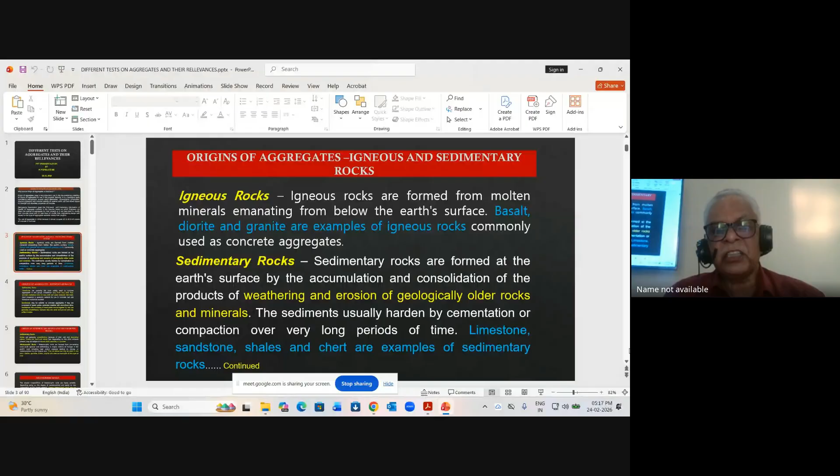Sedimentary rocks like limestone, sandstone, and shales are examples. Limestones are probably the most used concrete aggregates in this group. Limestones vary from hard, fine, grain crystalline rocks to very soft and weak material like chalk.

So hard limestone is generally suitable for use in concrete, but soft limestones are to be avoided. That means there are two types of limestones: soft and hard. Soft stone is not suitable for concreting. So these are concrete aggregates.

Again, there's sandstone. There are two types of sandstone. They can be used as concrete aggregates only if they contain quartz grains cemented together with amorphous silica. But there are certain ones bound with clay, and they are unsatisfactory to use in concrete.

Sedimentary rocks like shales are generally unsatisfactory because they are soft and absorptive. Cherts are hard and dense, but depending upon the silica minerals, they may be subject to severe alkali reactivity in concrete.

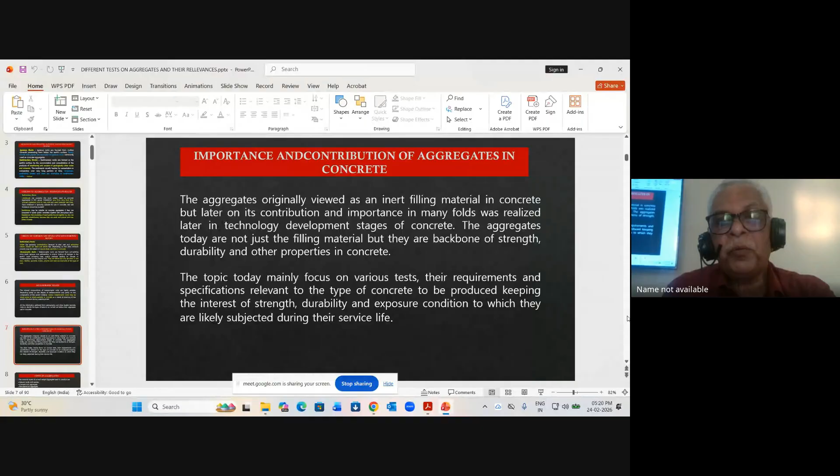Today, concrete aggregate is not just the filling material, it is a backbone of strength, durability, and other properties of concrete. The topic today mainly focuses on various tests, their requirements, and specifications relevant to the type of concrete produced, keeping in the interest of strength, durability, exposure conditions, weathering conditions, etc.

So there are three types of aggregates: natural sands and gravels, crushed rock sands, and manufactured sands. Natural sands and gravels are basically from riverbeds. At present, of course, they're not allowed to be used in construction.

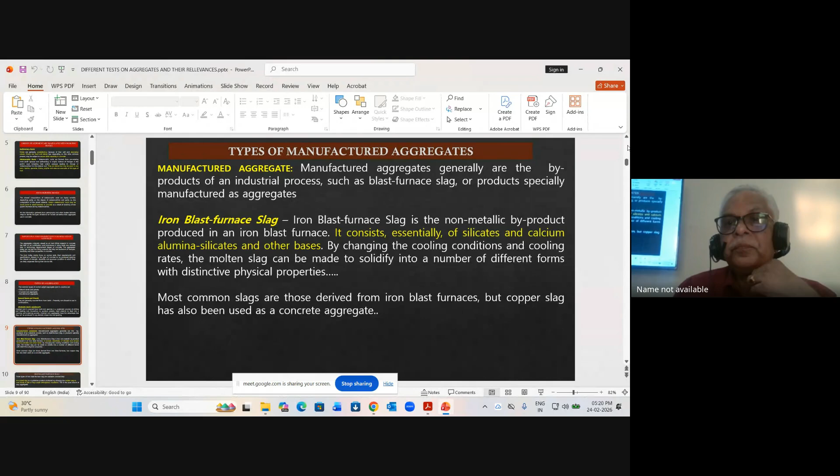Crushed rock is sourced from hard rock quarries. It is obtained by blasting, drilling, and screening. Such aggregates cannot have their properties modified. The only modification that can be done is cutting into proper shape and sizes. That's all that can be done with aggregates, because other properties depend upon the parent properties of the rock from which they are sourced.

Nowadays, there's even demand for manufactured aggregate. Manufactured aggregates are basically byproducts of industrial processes, such as blast furnace slag.

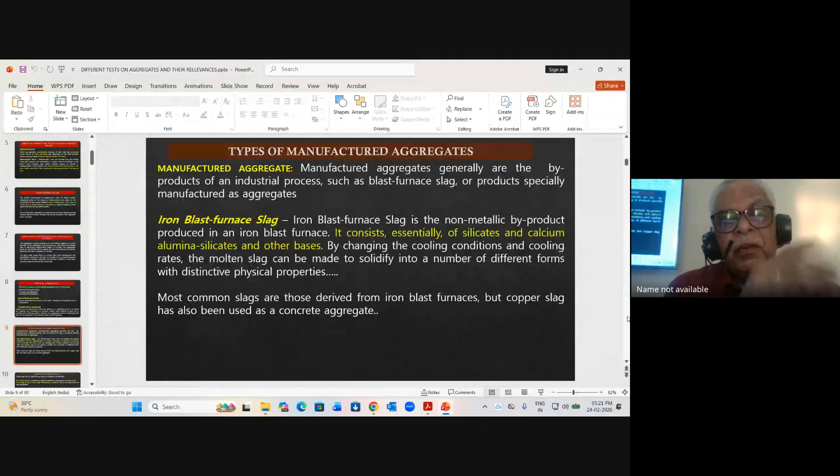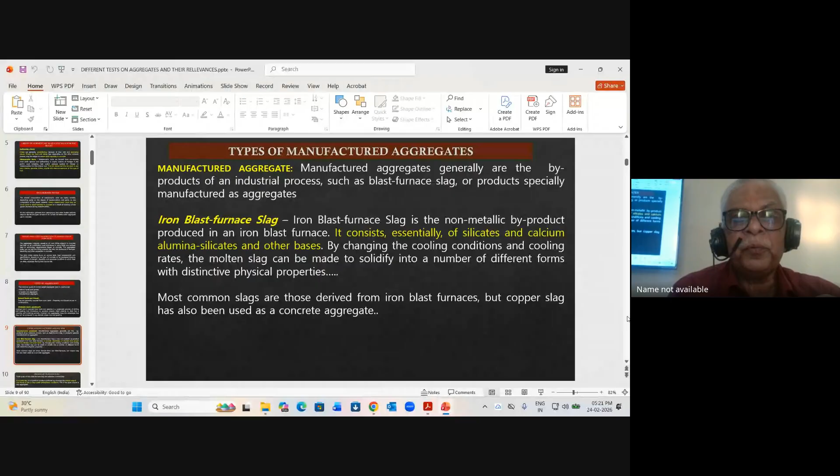There are different types of furnace slags. One is iron blast furnace slag, a non-metallic byproduct produced in an iron blast furnace. It essentially consists of silicates and calcium alumina-silicates, and other bases. By changing the cooling condition and cooling rate, the molten slag can be solidified into a number of different forms. Most slags are derived from iron blast furnaces, but copper slags have also been used as concrete aggregate.

Air-cooled slag, granulated slag, and foam slag are some typical examples of iron blast furnace slags. I will not go into much detail on it.

There are lightweight aggregates like expanded clay and shales. It is manufactured from clay and shale, heated to about 1200 degrees. When it begins to melt and fuse, some gases are generated which expand and form honeycombs, forming small cells in the aggregates.

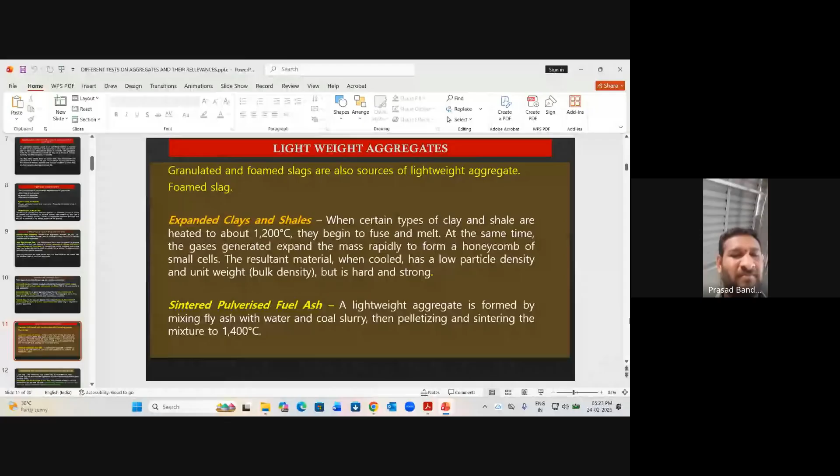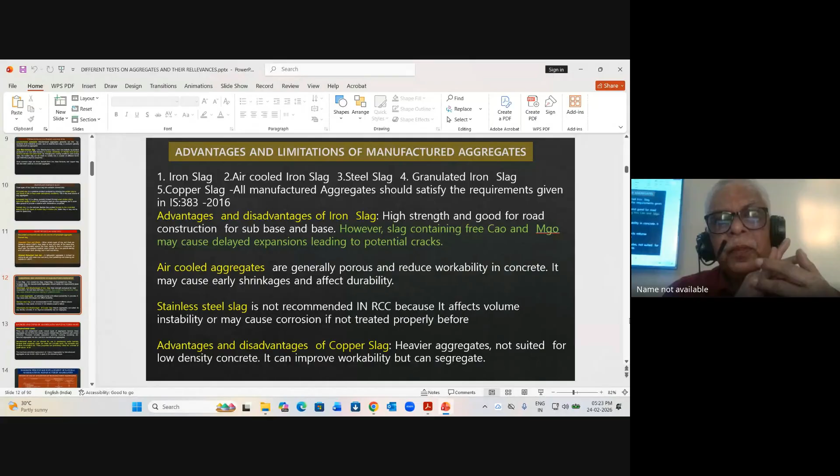Hello? Hello? Advantages, and we have to know, understand that... some disturbance is there. Hello? Mr. Prasad, can you please mute your mic? Thank you.

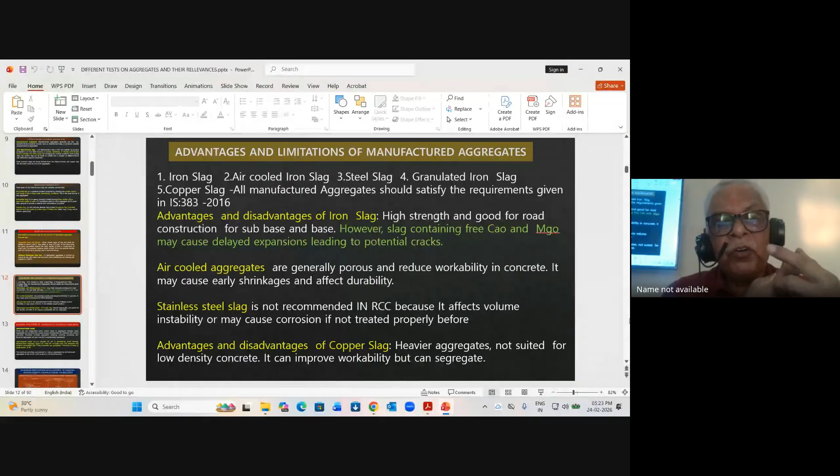So there are some advantages and disadvantages of using slag in concrete. First of all, iron slag has high strength and is good for road construction, for slabs, subbase, and bases. However, slag containing free calcium oxide and magnesium oxide may cause delayed expansion, leading to potential cracks. This is a disadvantage of using iron slag.

Air-cooled aggregates are generally porous, reducing workability in concrete. It may cause early shrinkage and affect durability. This is the negative aspect of air-cooled aggregates.

Stainless steel slag is not recommended in RCC because it affects volume stability or may cause corrosion if not treated properly beforehand. Copper slag is heavier, not suited for low density concrete. It can improve workability but can segregate concrete. These are the advantages and disadvantages of some of these.

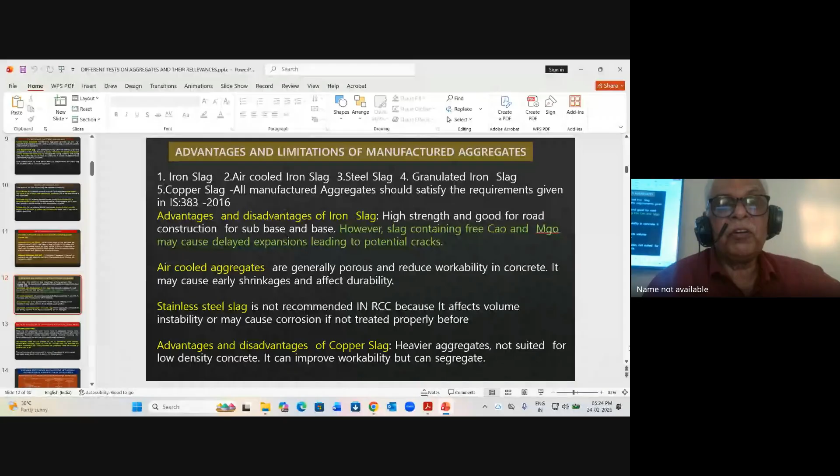There are reasons for that, some of which I'm going to highlight here. Replacement of iron slag aggregate in RCC is limited to 25% in RCC works. This is because higher replacement can lead to slow gain of strength and demand for extended periods of curing. This is a disadvantage with iron slag.

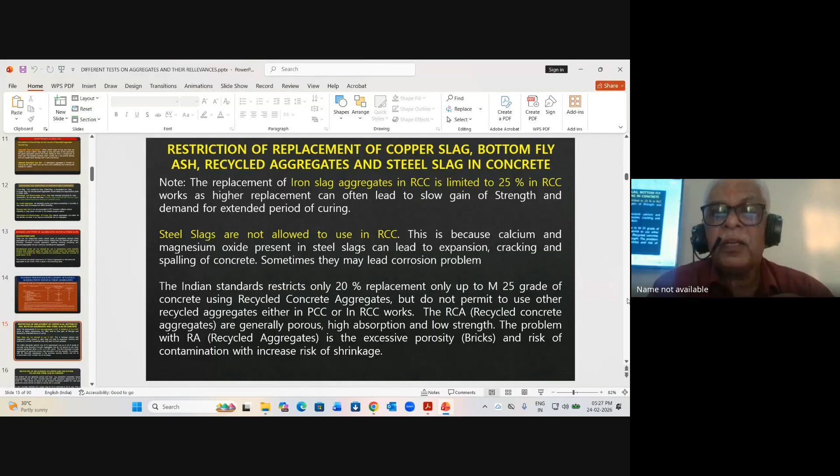Indian standards also restrict 20% replacement only up to M25 grade concrete using recycled concrete aggregates, but do not permit use of recycled aggregate either in PCC or in RCC work. Recycled concrete aggregates are generally porous, have high absorption and low strength. The problem with recycled aggregate other than concrete is porosity, risk of contamination, and high risk of shrinkage. That's why they're not allowed to use in some cases.

When we come to fly ash, bottom fly ash is generally porous and has low pozzolanic properties, and is recommended only for lean concrete, with a maximum percentage of 25%. In fact, IRC 74-1970 allows only Portland Pozzolana cement for road and pavement, but does not allow the use of fly ash in concrete.

In lean concrete, restriction of copper slag for fine aggregate is restricted to 50% maximum. This is because copper slag generally contains traces of heavy metals like arsenic, lead, which makes concrete unstable. It also causes delayed setting time, increased flow, sometimes leading to bleeding and segregation. Their specific gravity is more than 3.2, 3.3, 3.4. So any replacement beyond 30-40% can reduce the strength of concrete. It not only reduces the strength but also leads to segregation because of its high specific gravity properties.

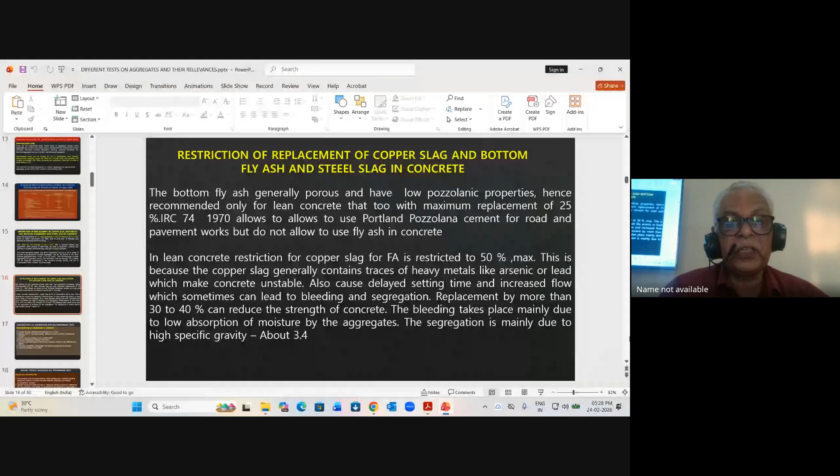What is the contribution of aggregates in recommended tests? Basic requirement is that aggregate provides strength, stiffness and durability to concrete, reduces voids in concrete thereby reducing porosity and also increasing strength, lowers cement content in the concrete mixture, ensures dimensional stability of concrete, improves durability against weathering, abrasion, chemical and other abusive attacks, improves workability, pumpability and finishing properties of concrete, and controls shrinkage in concrete. These are some of the main contributions of aggregates in concrete.

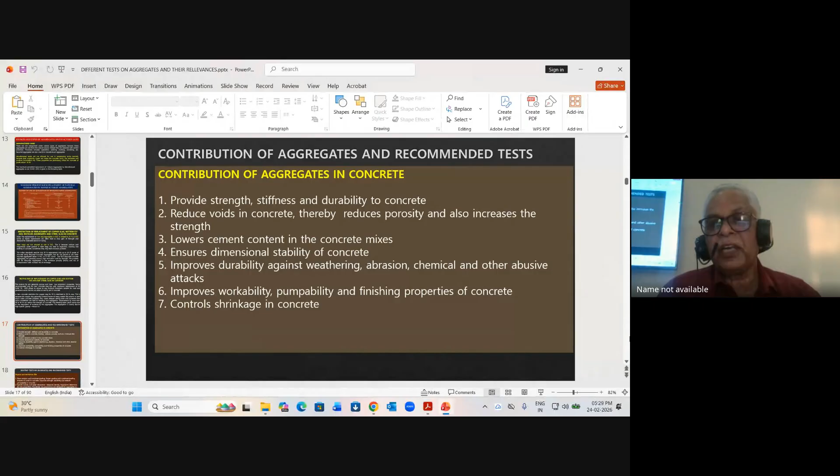Now we'll come to the testing part, routine tests. What I discussed so far is the basic properties of aggregate, sources of aggregates, different types of aggregate, and where they can be used. Now we are coming to routine tests on aggregates.

Sieve analysis and combined grading. Proper grading and combined grading ensures no voids in concrete; basically, it is done to ensure there are no voids in the concrete. It improves proper grading, improves strength, durability, and reduces permeability in concrete.

Specific gravity and absorption is a measure of density. It is required in the design mix calculation for proportioning the design mix. And of course, moisture correction is necessarily required because all aggregates in concrete are designed for saturated surface dry condition.

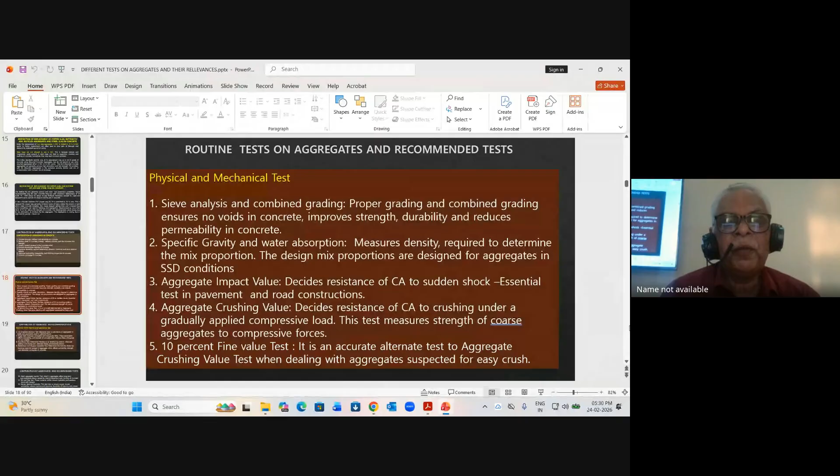Aggregate impact value decides the resistance of coarse aggregate to sudden shock. Essentially, this test is required for pavement and road construction. Aggregate crushing value decides the resistance of coarse aggregate to crushing under gradually applied compressive load; this test also measures the strength of coarse aggregate to compressive forces. The 10% fine value test is an accurate alternate test to the aggregate crushing value test when dealing with aggregates suspected of being easily crushed under small loads.

Coming to the Los Angeles abrasion test, it measures wear and resistance of aggregates in roads, pavements, and industrial floors. Shape test includes flakiness test and elongated test.

These parameters affect workability and strength, especially when aggregates are flaky, elongated, and non-angular. They influence workability and reduce the strength of the concrete.

Soundness test determines the resistance to weathering actions, alternate wetting, and alternate freezing and thawing. Deleterious and organic impurities tests determine the limit of these harmful materials present in aggregate, which affect the workability, strength, and durability properties of concrete. So these are the listed tests.

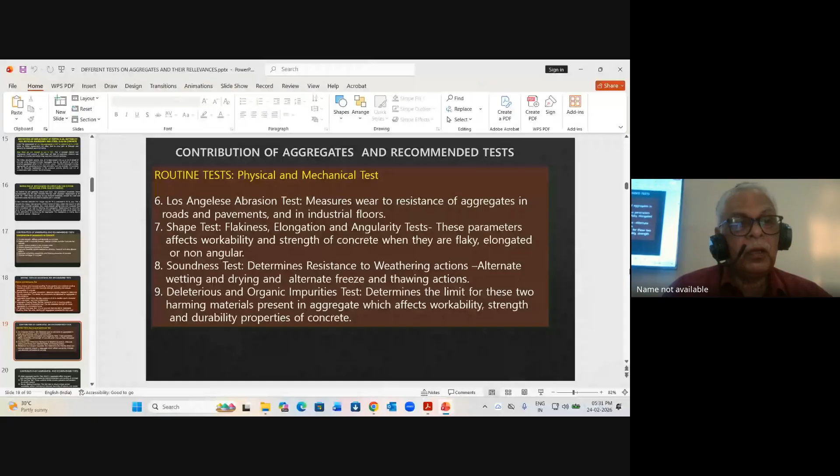There are some more tests like alkali aggregate reaction, which affects long-term performance and causes premature failure due to internal expansion and cracking of concrete.

Silt and clay test: it inhibits cement hydration and weakens the bond with the cement.

Mortar cracking properties test helps ensure proper mortar workability, reduce cracking, and improve durability of masonry and plasterwork. Bulking of sand test is required mainly for volumetric proportioning.

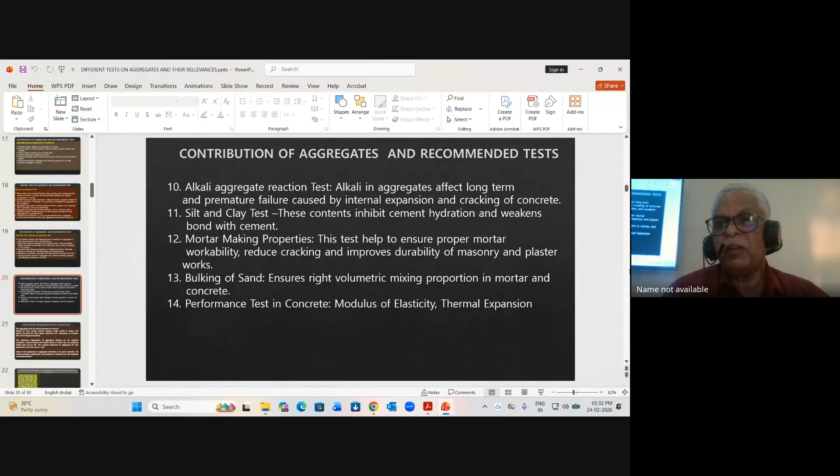One is a performance test, like modulus of elasticity and thermal expansion. I will brief some of them with some examples.

So what is the primary requirement of aggregate? It should be clean, strong, durable, angular, rough, cubical in shape, well graded, and free from silt, clay, etc. This is as per Indian standard specifications.

In addition, they have to resist the abrasive forces they are subjected to during service life. It can be high weathering conditions or something like that.

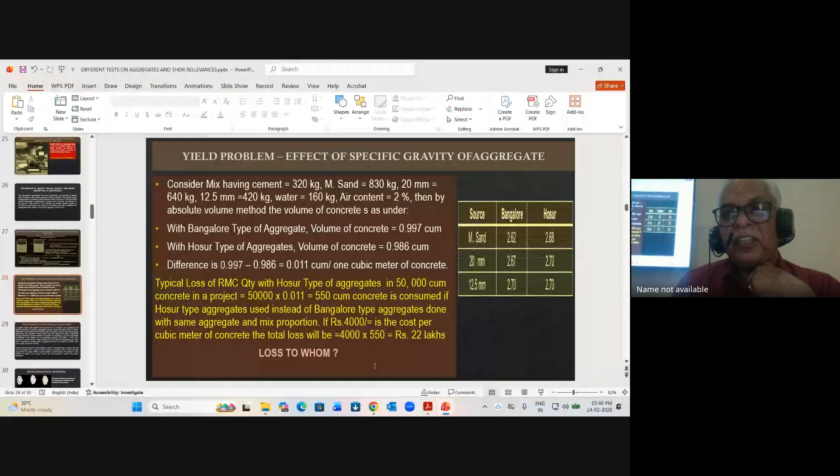So we had explained this kind of problem when we faced it in Bangalore. Suddenly we had to change the sources and we started getting this difference and loss also. That's why I thought I should share all these details with you. So specific gravity of aggregate is very, very important. It is better every 6 months or 1 month you recheck the specific gravity in the concrete mixes.

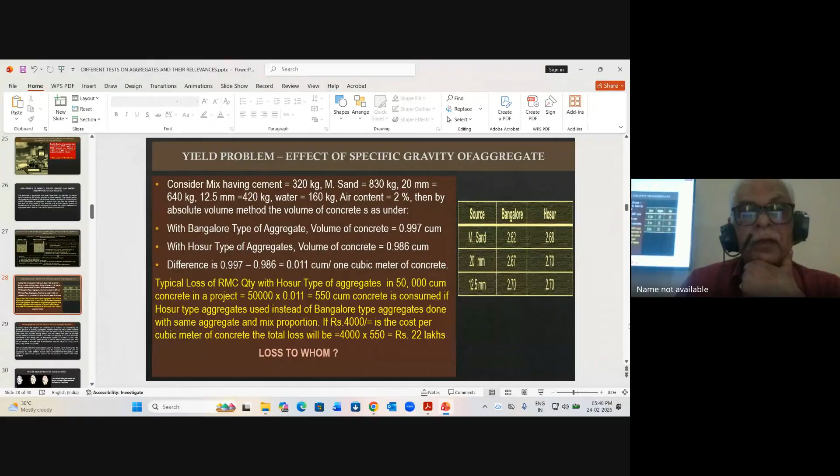Even water contributes more. Of course, water does not come under part of aggregate, but is a part of the concrete mixture. What happens to water? You are designing the mix in the RMC plant, considering certain water, let us say 175 liters, whose volume is about 0.175 cubic meter. But during transit, it will lose some moisture because of evaporation losses, and it can reduce to 165 liters. So there is a loss of about 0.01 cubic meter of concrete.

I will not go into much detail on this water aspect, but I will just give an example of how these mixes change because of specific gravity and water losses.

In design mixes, we consider 3 types: oven dry, saturated, and saturated surface dry. The first one is oven dry, where there is no moisture, neither inside the aggregate nor outside. In saturated, there is moisture fully inside, but there is no moisture on the surface of the aggregate. Then there's wet and saturated aggregate. For design mixes, we are considering only saturated surface dry aggregate. So this is very, very important.

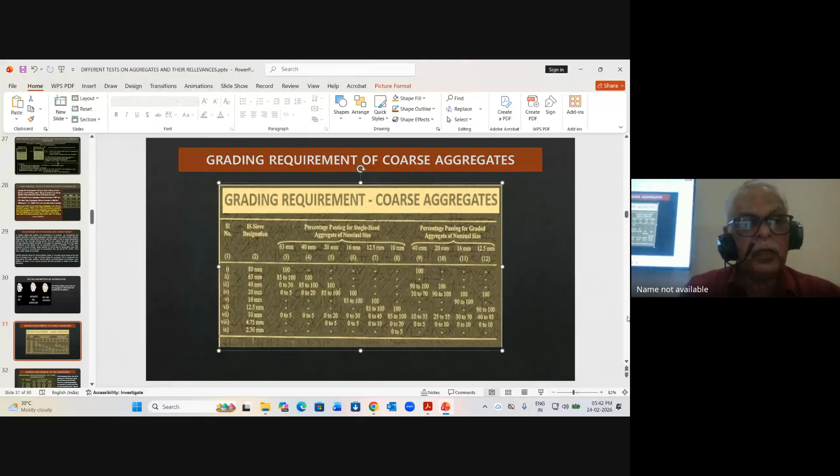So for grading requirements of aggregates, IS standard has given some limits for single size aggregates, and also for coarse and fine aggregate. What is more interesting here is, Indian standards allow for 20% passing in 150 micron sieves. But for normal river sand, it allows only 10%.

This is basically because crushed aggregates are angular in shape and they do not pack smoothly inside the concrete. River sand is generally round, so it fills up the voids very easily. Whereas crushed sand is angular in shape, so it will not fill as well. That's why the code has permitted use of a little extra sand so that there's no gap in the final particle packing in the lower sieve sizes, and the higher 150 micron percentage of fines also helps in pumping of concrete.

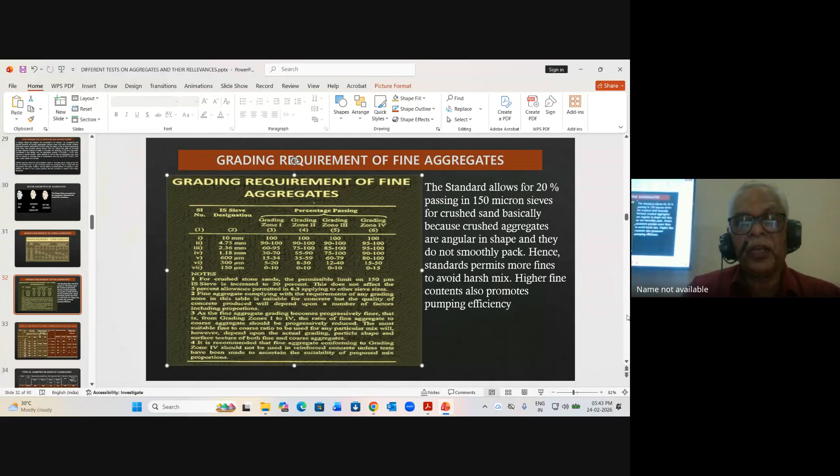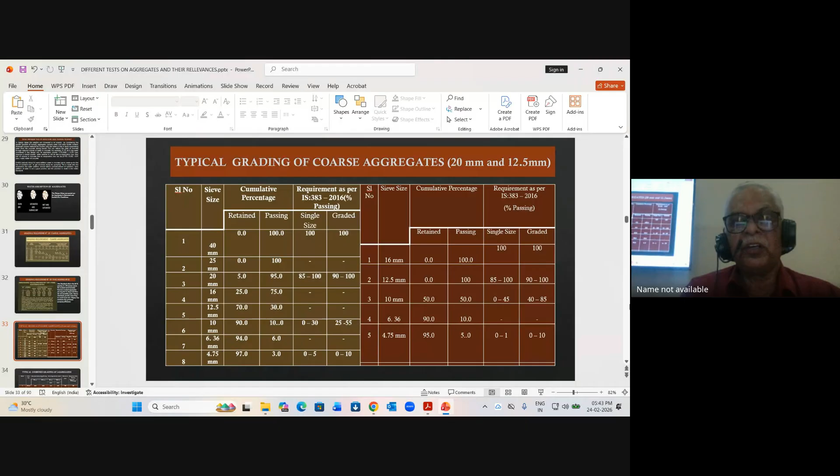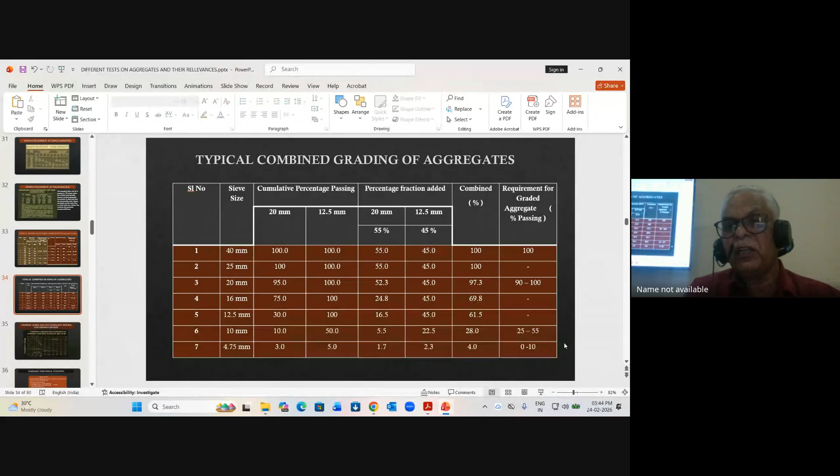This is a typical example: one is 20 mm aggregate, the other is 12.5 mm aggregate. I will not go too much into this since you're doing it almost every day. These are combined against a typical 20 mm grading. I consider 55% of 20 mm passing through, and 45% of 12.5 mm, and I have arrived at the combined grading which satisfies the IS requirement. This is how combined gradings are done, most of which you must already be in practice of doing.

It allows for 30% for use in wearing surfaces, basically for roads and pavements. There's a procedure given in the IS code for how to do it, but I will not go deep into it because this method is already known to most of you.

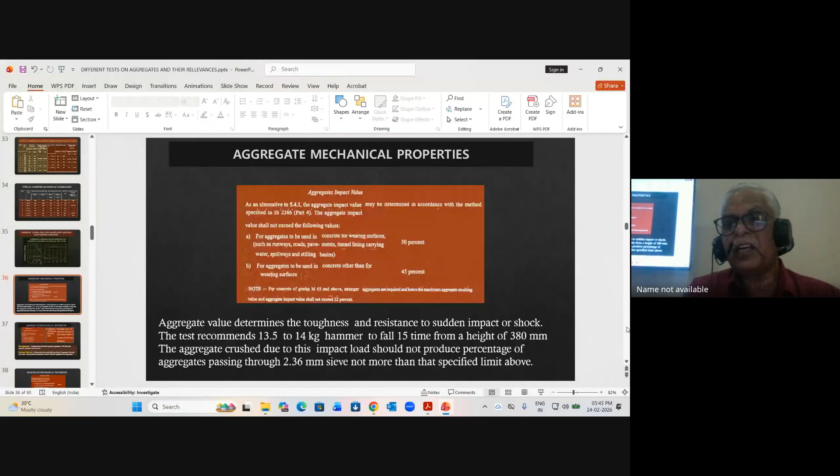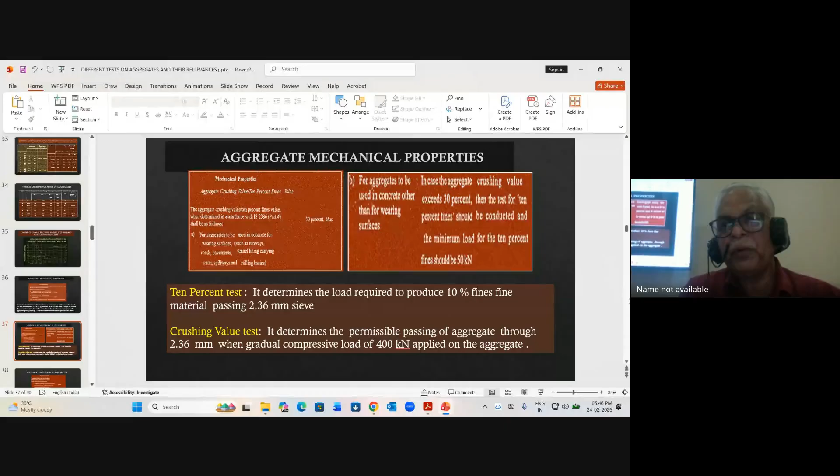Similarly, mechanical properties like crushing value, 30%, and for aggregates, 10% fines value - these are the tests recommended in the IS code. 10% fines is very critical for roads and pavement construction; that has to be taken care of. Abrasion value is also given. I will not go into deep detail on the procedure. For non-wearing surface it is 30%, wearing surface 30%, and non-wearing allows for 50%.

As far as IS code standard IS 383:2016 is concerned, it demands additional requirements for slag, like iron and steel slag - it accounts for calcium oxide, sulfur, iron, etc., and gives limits also. For copper slag too, these limits are given. There's no harm if you use more than that in some respects, but it can cause harm in terms of cohesiveness, segregation, or active chemical reaction. So with a lot of study, they are limited to this requirement. This is for copper slag, this is for steel slag - these are the requirements as per standard.

For manufacturing also it has given requirements, like alkali content, sulfate content, acid soluble, water absorption, etc. This is another additional requirement for electric furnace slag. So various additional steps are recommended, especially for slag concrete. This was not there in our previous 1970 code, because nowadays additional slag is also being planned for use.

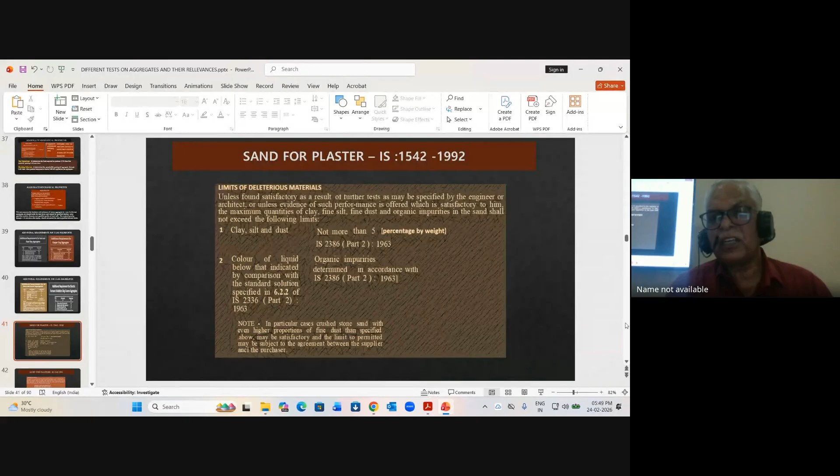But for concreting, there is no flexibility. Some flexibility can be allowed for plastering, but we should not harm the concrete. This is sand for plaster - there's a specification IS 1542 which gives a standard. The IS designation is given, and more than that, it also gives fineness modulus, which shall be not less than 1.4 in case of crushed stone, and for crushed gravel it gives even fineness modulus limits for plastering sand.

So normally what we are using is generally - I have seen in construction they follow only IS 383 for concrete aggregate zone, passing in zone 3 or zone 4, but it is not the right standard. For this, I suggest people should go for these standards to find the right type of aggregate for plastering.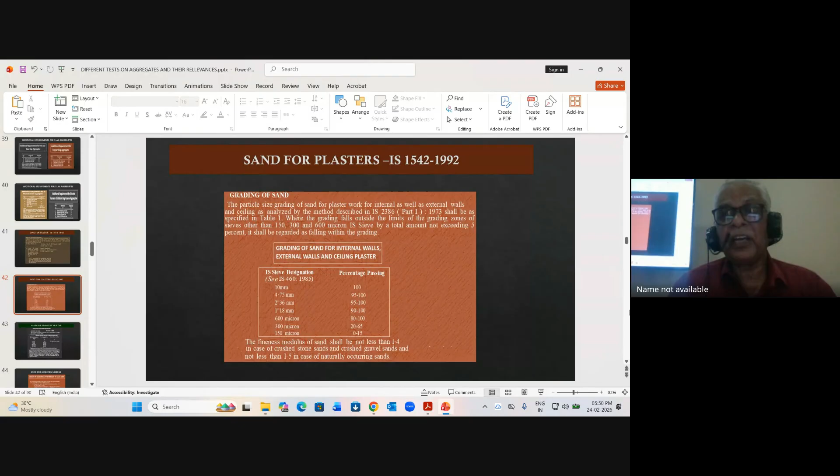This is for masonry mortar - IS 2116 is the standard for masonry mortar. These limits are given, all in the IS code. You just have to go through IS code 2116. Very important - this covers how much clay content, organic content, etc. That also can be referred to.

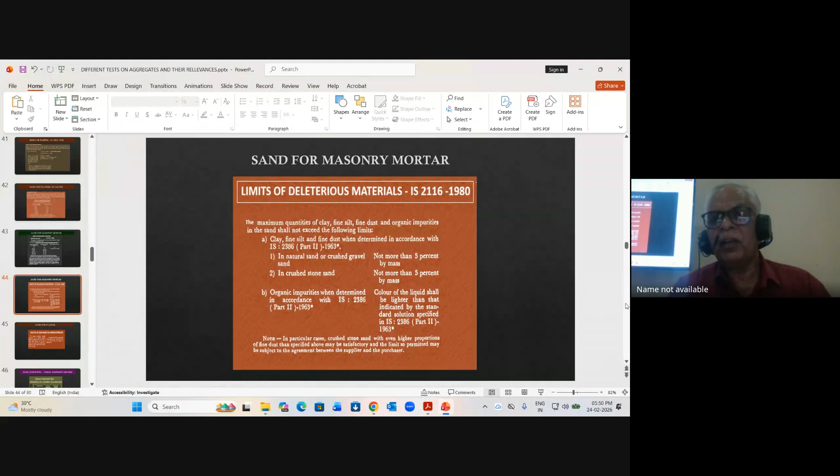And for selection of aggregate for plastering, IS has given a separate method - 2250 gives a method to find whether this aggregate is suitable or not, a particular method for whether sand is suitable for mortar. It specifies a minimum 3 Newton per millimeter at 28 days strength. The procedure is available - please go through IS 2250/1981, based on which you can select the type of aggregate for plastering purpose. If it meets this, then it is good for plastering. This is how we take the decision.

When it comes to mass concreting, I understand it has given certain guidelines for designation - what should be the percentage of grading of aggregate, coarse and fine aggregate. These are just guidelines, given in IS 383:2016, that can be referred to.

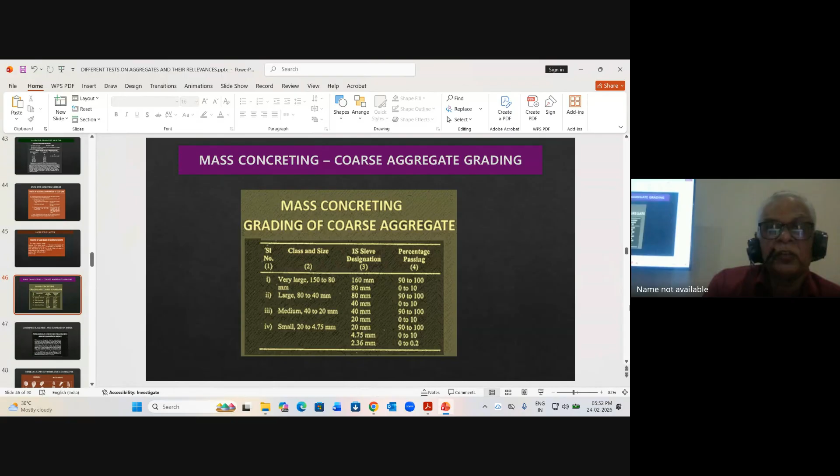Angularity number plays a very important role, especially in road work and construction. The packing density of aggregate also depends on shape and angularity number. If spherical particles are packed together in a space, the volume of solid will be such that, if you take only rounded aggregates in a container, about 67% is occupied by the aggregate.

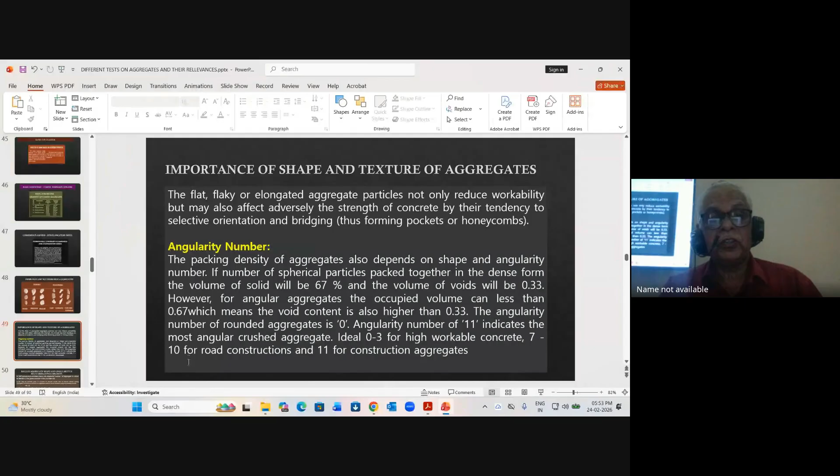Angularity number 0 means rounded aggregate, while angularity number 11 indicates mostly crushed aggregate. Ideally, angularity number 0 to 3 is for high workable concrete, 7 to 10 for road construction, and 11 for normal building construction. These are the limits you can consider. It's not given in any standard, but it's a general guideline based on literature and studies.

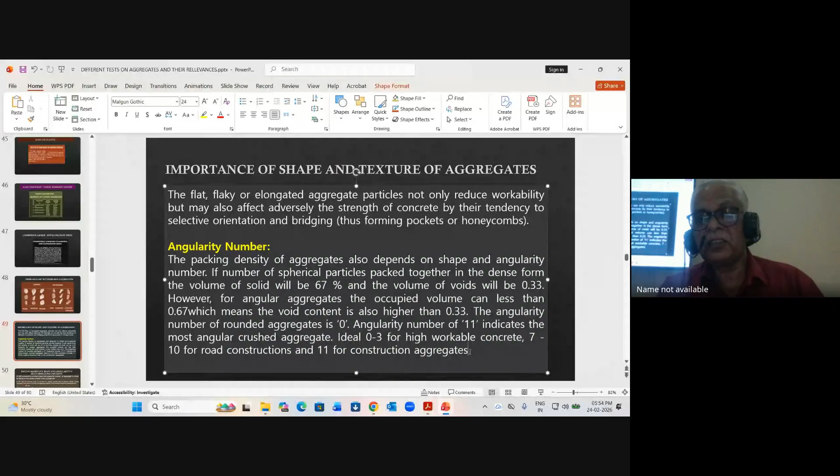Now, an interesting question: what is self-compacting concrete? The difference between normal concrete and self-compacting concrete is that in self-compacting concrete we require some extra paste in addition to what is required for normal concrete. So whatever paste is required for normal concrete is also required here, plus additional paste.

This extra paste requirement can be decided from an expression taken from some research papers. This formula shows how much extra paste is required, and it depends on a value called RSA, which accounts for shape and angularity, with examples given. For a typical shape you take value 1, and for other shapes you take 2 or 3. From the shape you can decide this number and apply it in the formula.

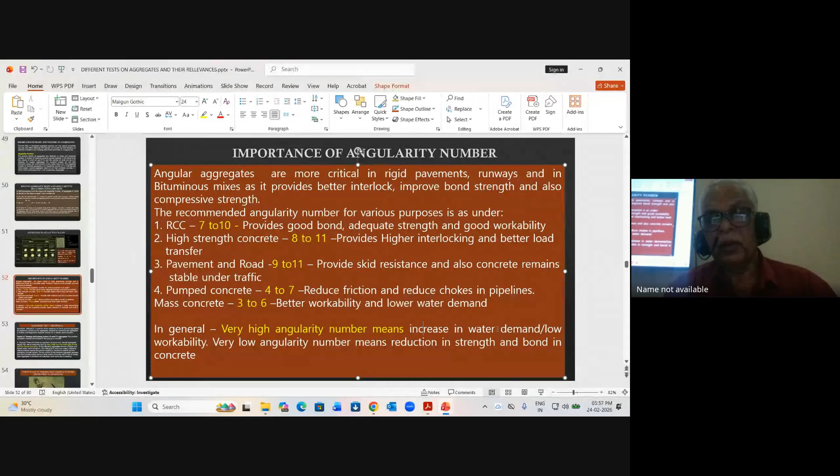These recommended angularity numbers are again not given in the standards, but are a general norm based on many literatures. High angularity means increased water demand and low workability. Very low angularity means reduction in strength and bond in concrete—like with rounded aggregates, the bond is poor so strength is also not good. Whereas a very high angularity increases water demand. So these are some factors you have to think about.

Now we come to the soundness test. This test is conducted by immersing the aggregates in sodium and magnesium sulfate solution for a specific duration. This is very critical for assessing the effect of freezing and thawing action of water in aggregate. I will explain this with a photograph also.

See what happens in pop-outs—especially expansion of porous, low density aggregates with high rate of absorption. This occurs in materials such as shale and coal. This type of pop-out occurs due to freeze and thaw action.

Very important: the offending aggregate absorbs moisture and freezes. When it freezes, it exerts a swelling pressure more than 9% greater than water pressure. This swelling exerts enough pressure that the aggregate starts breaking, so the top portion of the aggregate fractures and separates from the concrete surface.

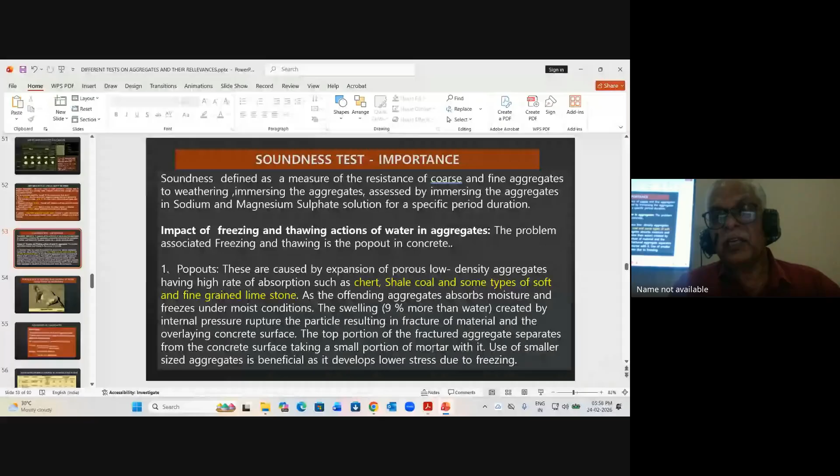A typical example is shown here—this is the aggregate after popping out, which also takes away some mortar from the concrete. This happens basically because of freezing and thawing action. The soundness test is very critical for this, because it indicates how the aggregate behaves under excessive pressure induced from freezing and thawing action, and reveals any expansive nature of materials in the aggregate.

So these are the soundness tests.

So these are the requirements of the soundness test, again given in the IS code. I will not go very deep into the specification as it's already available in the standards. This is also available, the limit for soundness is available in the IS 383 standard. I'll not go into deep detail because in your day-to-day activities, you must be following all these things.

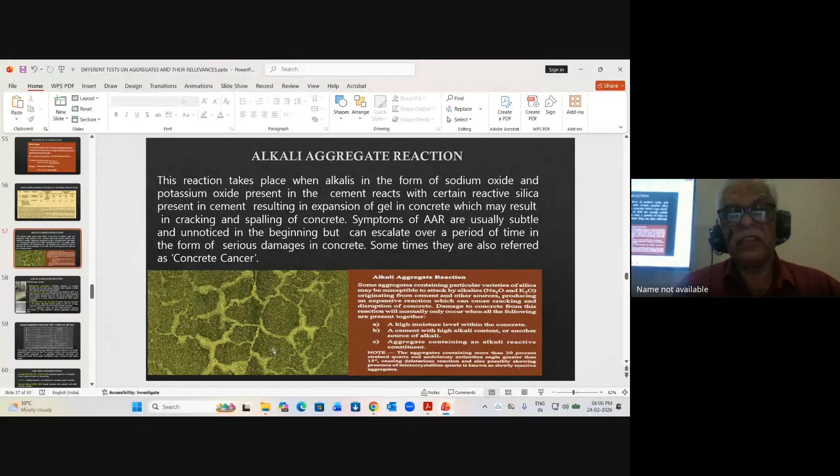Now coming to the alkali aggregate reaction - this is very important. Alkalis in the form of sodium oxide and potassium oxide present in cement react with certain reactive silica present in the aggregate, causing alkali aggregate reaction. This increases the volume, and you can see this type of cracks formed by alkali aggregate reaction - very critical.

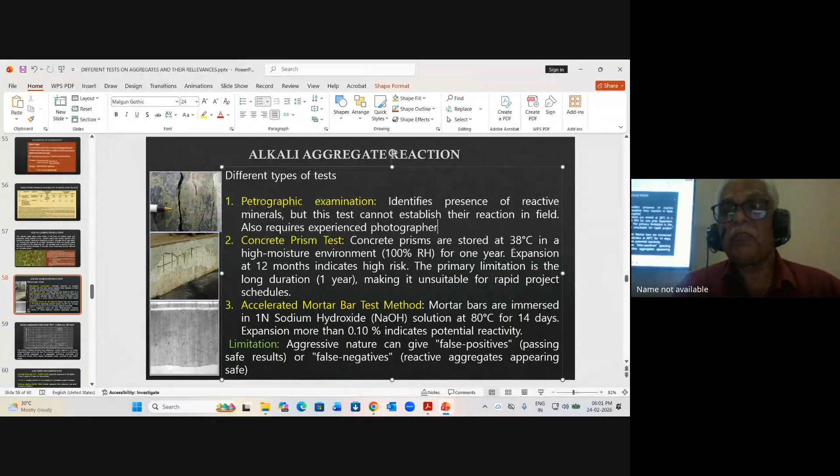The Indian standard has given some methods: petrographic examination, prism test, accelerated mortar test, etc. They have their own advantages and limitations. For example, if you go for concrete prism test, it takes about 1 year to decide, so until then the project cannot wait. Accelerated methods can be used, but they can sometimes give misleading information also. So petrographic examination is required, and the IS code has one chemical method.

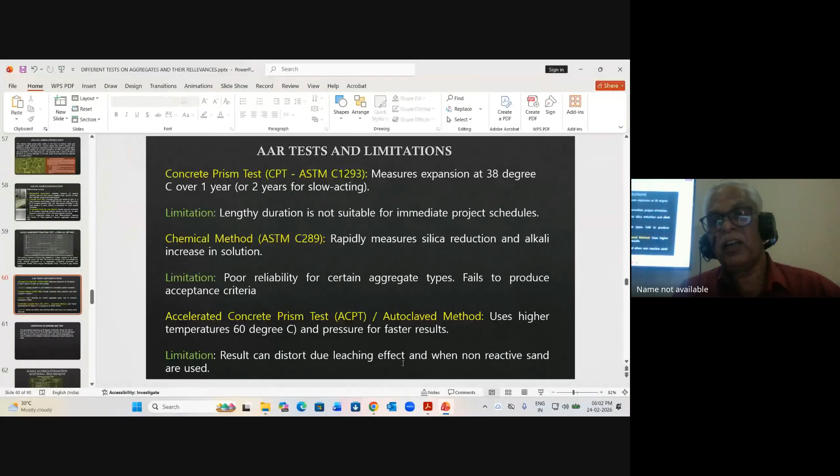Limitations: prism test has lengthy duration, not suitable for immediate project schedules. Rapid methods measure silica reduction and alkali increase but have poor reliability for certain aggregate types and fail to produce acceptance criteria. The autoclaved method uses higher temperatures and pressures for testing, and results can be distorted due to leaching effect, especially when non-reactive sand is used - these are misleading and some disadvantages of these tests.

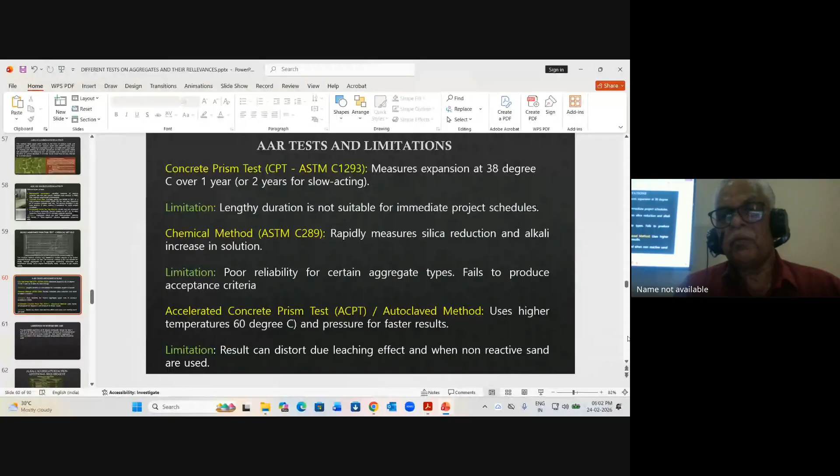So basically, when you give it to the third-party laboratory, they will be able to help you out. This is just general information I am giving.

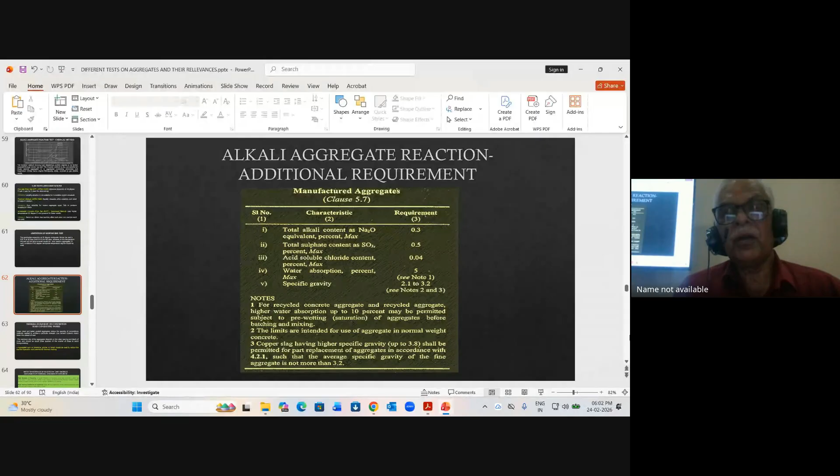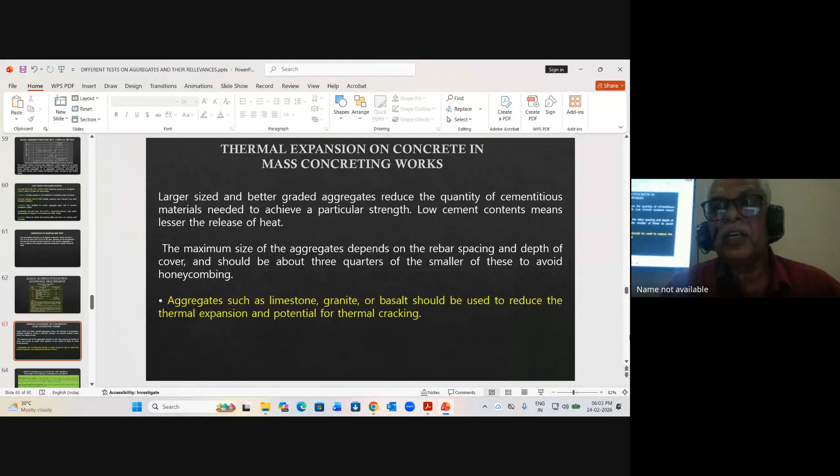So as I told you, now we come to the question of mass concreting. For another 10-15 minutes I'm going to give you this lecture. Mass concreting basically is about what is more important - the rise of temperature inside the concrete and how fast it dissipates from the core temperature to outside.

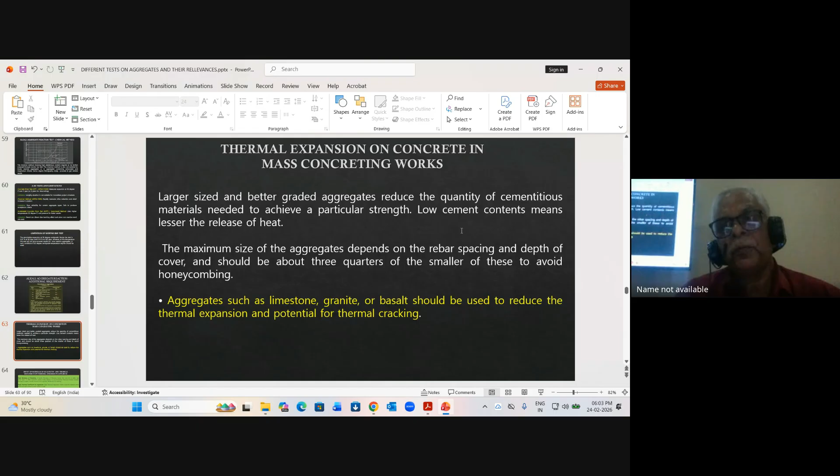So the development of inside temperature first should be controlled. That is possible with less cement content. Less cement content is possible only with higher size of aggregate, which requires less cement content because its coating requirement is relatively less compared to higher size aggregate versus lower size. In lower size aggregate, more coating has to be done with cement. More cement coating means more cement content, and more cement content means higher release of temperature. So higher size aggregates are desirable.

Then there are two important factors to be considered in mass concrete: high modulus of elasticity and high thermal coefficient of expansion. These are the two factors which affect the thermal stresses in concrete. Higher modulus of elasticity means concrete is stiffer and more rigid, so a stiffer concrete cannot easily deform to accommodate thermal changes, leading to higher tensile stresses and greater chances of cracking.

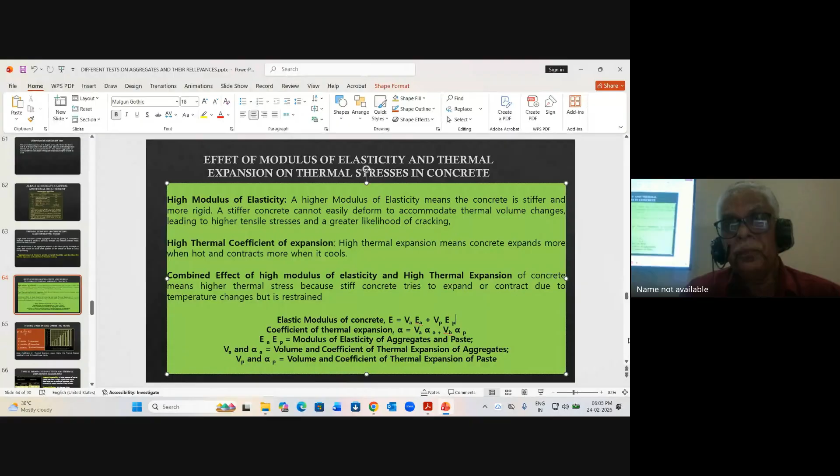Higher thermal coefficient of expansion means concrete expands more when hot and contracts more when cool. When combined, temperature stresses are found using this equation. So the thermal stresses in mass concrete depend upon this equation, and it also depends upon the thermal expansion of the aggregate.

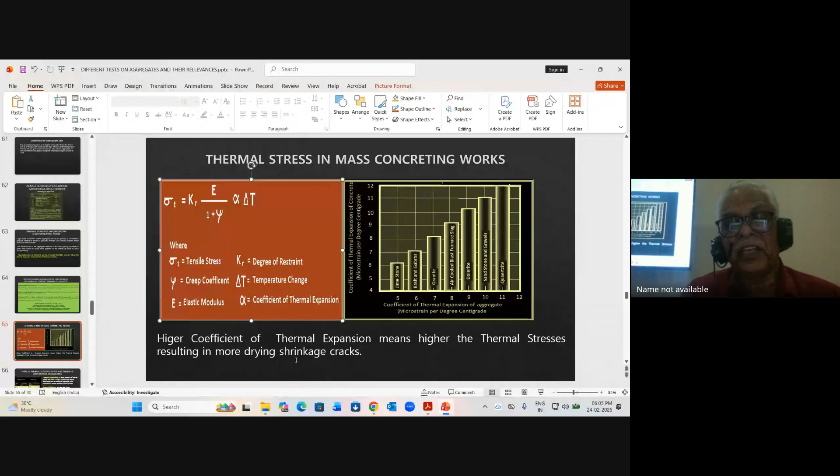This is a chart for thermal expansion for limestone, granite, and air-cooled slag - a typical one. Higher the coefficient of thermal expansion, higher the thermal stresses, resulting in more drying shrinkage cracks. Lesser the coefficient means lesser the thermal stresses. So the most common problem in mass concrete work is the expansion and cracking due to drying shrinkage.

Two other important factors to consider are thermal conductivity and thermal diffusion. Thermal conductivity measures the rate at which heat flows from the inner core to the surface of concrete. High conductivity means faster transfer of heat. Thermal diffusion is the rate at which temperature change occurs within the mass, allowing quick equalization of temperature, essential for reducing temperature difference. Higher thermal conductivity and higher thermal diffusion both mean faster dissipation of heat to the concrete surface.

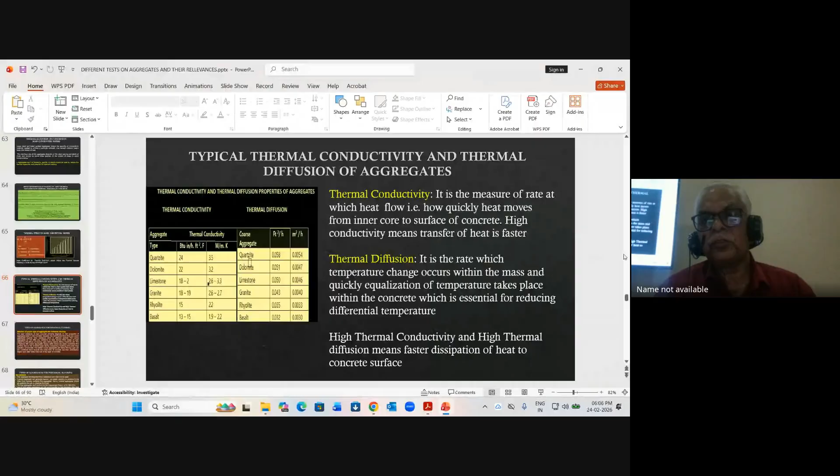Quartz, dolomite, etc. are given as examples for convention, so you have to choose the right type of aggregate. Unfortunately, in projects you are often forced to use only the available aggregate at the site. If possible, procure from some distance. If not, you have to adopt other measures like using low heat cement, ice water, or ice in concrete.

Now we'll come to industrial flooring. Fine aggregate from weathered rock should not be used, but crushed aggregate can be used, and fine aggregate should be in zone 2. Lightweight aggregates are not recommended as they generally offer least resistance to abrasion. For example, corundum and andesite aggregates offer 3 to 4 times more wear resistance compared to pure cement mortar, and 2 times more resistance than mortars prepared with dolerite, dolomite, quartzite, and granite aggregate, and 20% more than mortar prepared with decomposed granite.

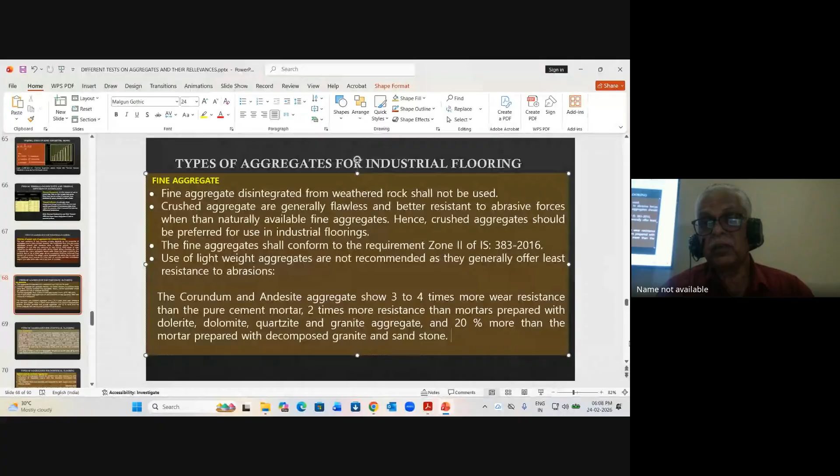So from this example, corundum and andesite aggregates are much suited for industrial flooring. For fine aggregates, what you have to ensure is that the silica content should not be less than 40% if you want good skid resistance.

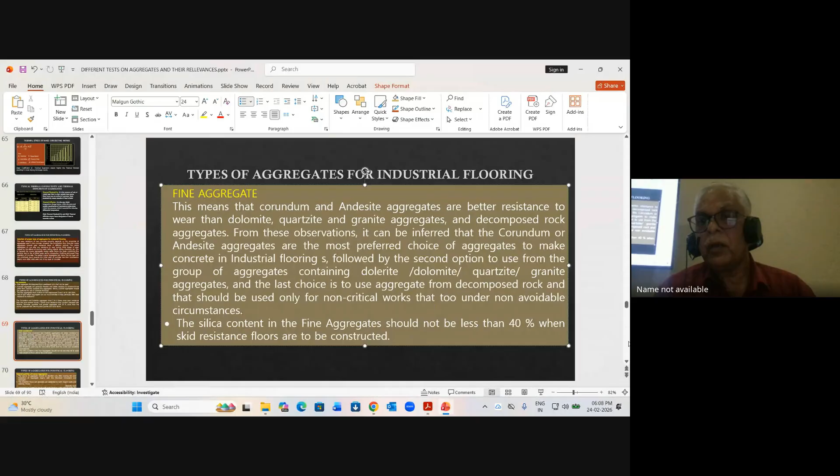In industrial flooring, the top layer of the floor slab is made with fine aggregate and cement, with coarse aggregate below. This means the fine aggregate is very important because, being the top layer, it has to offer resistance first. Once it wears out, the coarse aggregate below comes into action. So aggregate selection is very, very important.

Another thing is that an aggregate which best resists abrasive forces need not also best resist impact loads. So you cannot say that a good abrasive-resistant aggregate is also good for impact resistance - that's not correct. Basically, hard aggregates are brittle in nature and easily fracture under impact, while soft aggregates, which are resilient in nature, absorb impact loads better than hard aggregates. So the type of aggregate for industrial flooring should strike a balance between the two.

Again, as I told you, there is restriction because we are forced to use the aggregate available at the nearby source. But in such cases, you have to go for other methods like different types of floorings or floor coverings.

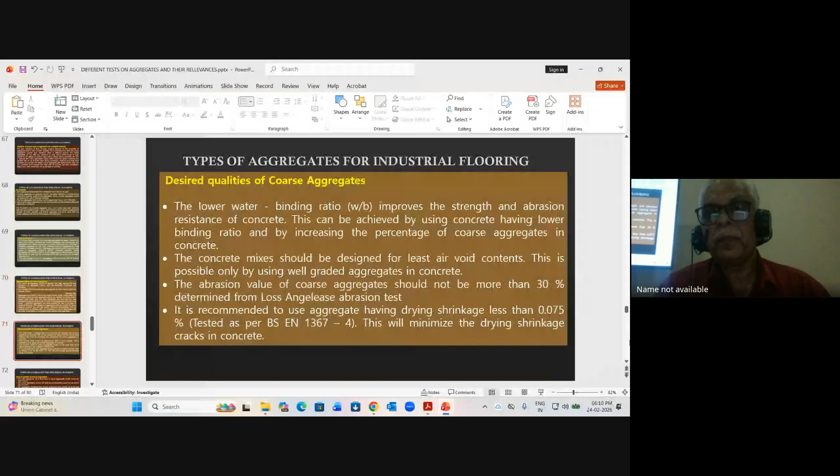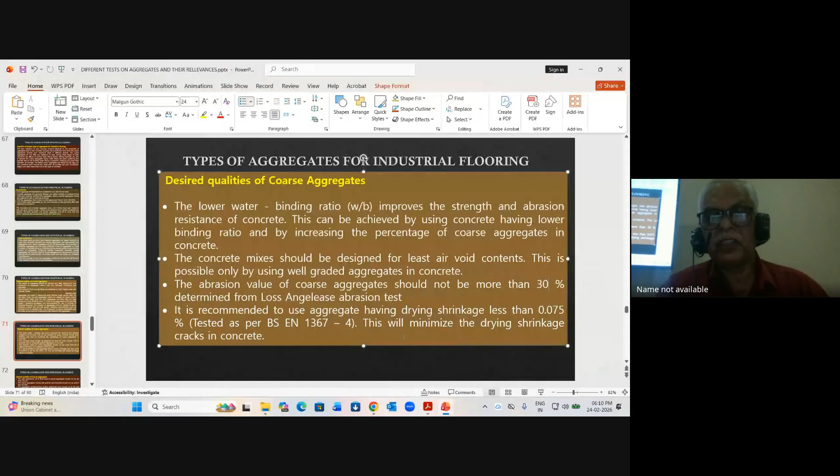A lower water cement ratio improves strength and abrasion resistance, and should be designed for least void content. Abrasion value of coarse aggregate should not exceed 30%. Shrinkage should be less than 0.075% as per standard. These are the properties of aggregate you have to use, and the load required for 10% fines in coarse aggregate should not be less than 150 kilonewtons.

Soft aggregate should not be used, and weathered aggregate should not be used. If nothing suitable is possible, you have to go for alternate materials like steel fibers, or make up the deficiency with flooring or floor coverings.

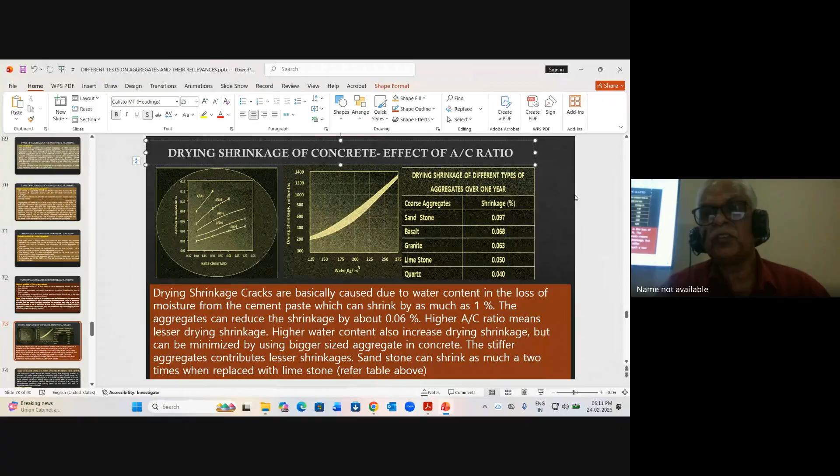Now we'll come to the drying shrinkage of concrete. Aggregate plays a very important role here through the aggregate cement ratio. Higher the aggregate cement ratio means lower the cement content, which results in lower shrinkage. Conversely, lower the aggregate cement ratio means higher the cement content, which causes higher drying shrinkage cracks. So the aggregate cement ratio plays a very important role.

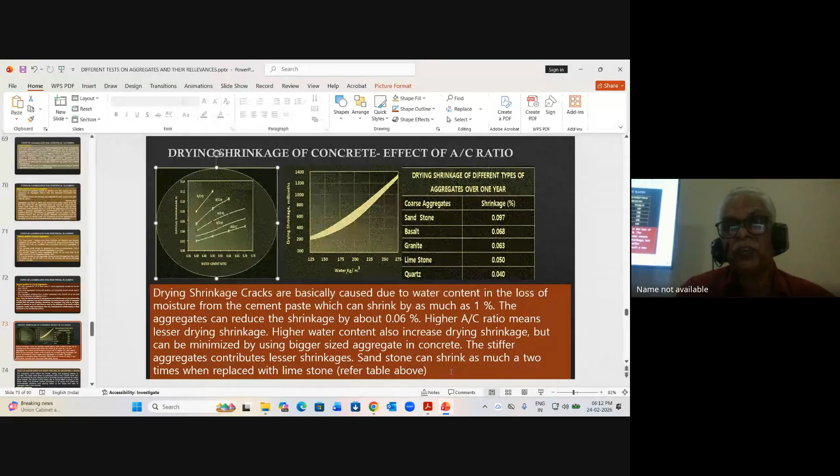The problem with shrinkage is that drying cracks are basically caused by loss of moisture from the cement paste, which can shrink by as much as 1%. But by using a suitable aggregate cement ratio, this can be countered, reducing shrinkage by about 0.06%. So we have to use aggregates of larger size and less cement to reduce drying shrinkage cracks. Certain types of aggregates also influence this - for example, sandstone shrinkage is about 0.097%, limestone is lower, so if you have a choice, use limestone to counter shrinkage, since the ratio between sandstone and limestone shrinkage is almost 2.

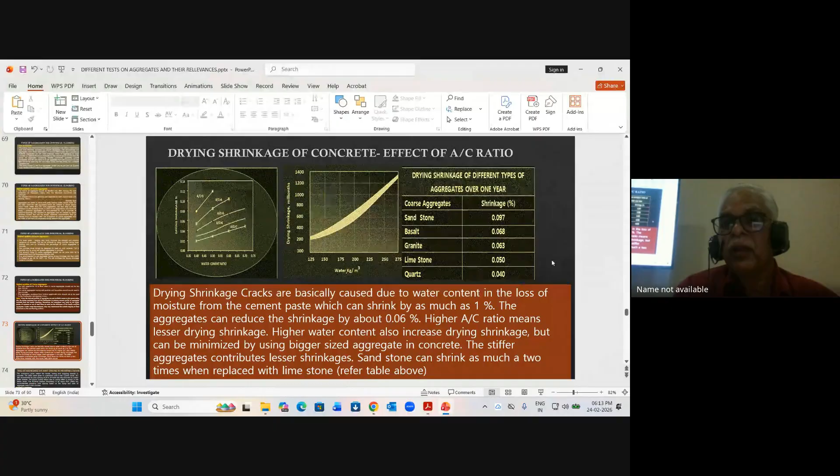So these are the guidelines I can give you, but it's only for informative purposes and how best you can use them. You have to think about it.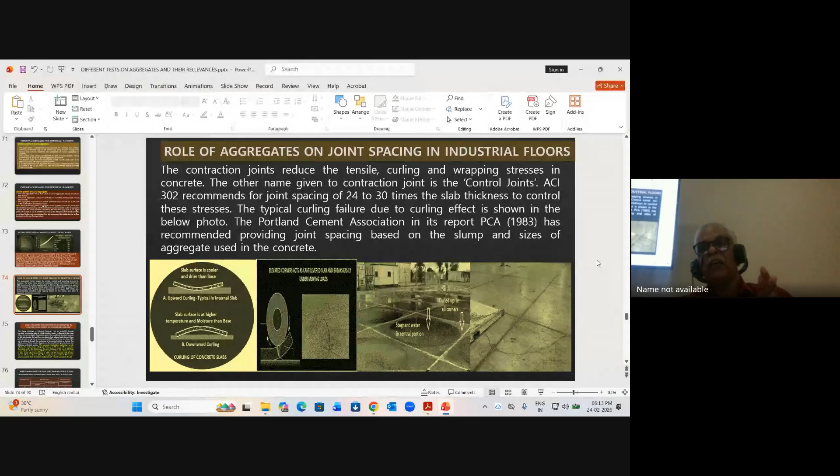Now aggregate plays a very important role in joint spacing in industrial floors. In industrial floors, you are providing contraction joints to take care of tensile, curling, and warping stresses. The other name given to contraction joint is a control joint. ACI recommends a joint spacing of 24 to 30 times slab thickness to control these stresses.

The typical curling failure due to curling effect is shown here. See how the cracks appear due to curling, especially at the corners. You can see water stagnated in this portion, because curling means the corners lift up, and when the vehicle moves, it crushes.

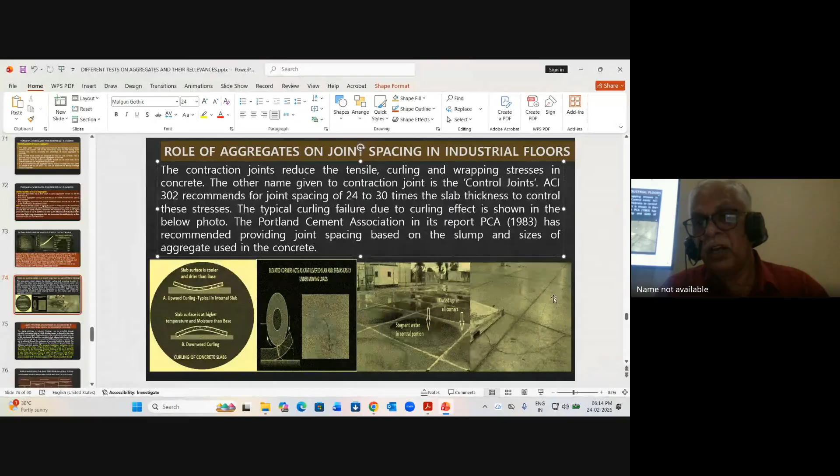So basically for industrial floorings, contraction joints are provided, where the construction joint allows cracks to appear exactly at the contraction joint, below the saw cut depth.

Aggregate plays a very important role, especially with respect to shrinkage, and aggregate interlock.

Contraction joints placed at certain intervals also come into play. In contraction joints, since there is a gap, load has to transfer from one slab to the other. How is this possible? Because there is already a crack inside the contraction joint. So transfer of load has to happen from one slab to the other when the vehicle moves from one end to the other.

But how to transfer the load? One way is providing dowels, the other is to provide aggregate interlock. Aggregate interlock plays a very important role, but it has got certain limitations also.

You need not use dowels in certain cases, there's an advantage too. Effectiveness of load transfer depends upon the vehicle load, dynamic load, slab thickness, and spacing. The aggregate interlocking mechanism is only effective for smaller loads.

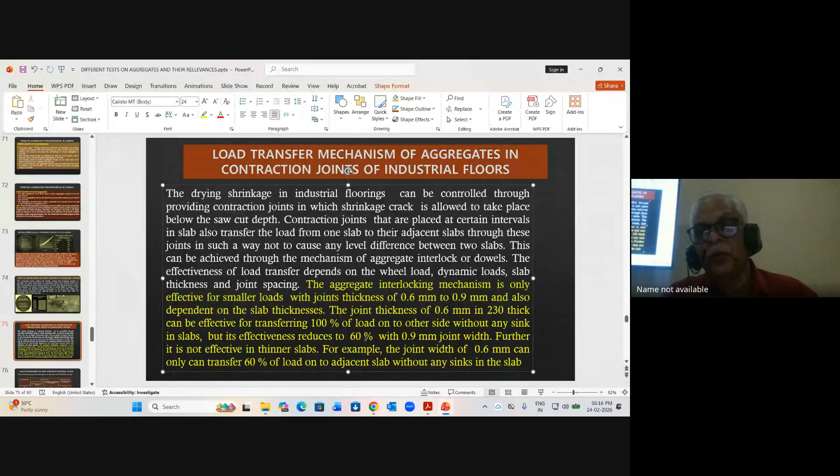In special industrial floors, where only wheel loads and packing loads are present, the joint thickness is 0.6 mm to 0.9 mm, depending on slab thickness. A joint thickness of 0.6 mm with 230 mm slab thickness can effectively transfer 100% of the load to the other side, for smaller loads not subjected to lining loads. But if the joint width is more, say 0.9 mm, it can transfer only about 60% of the load to the other side. So these are the factors.

Of course, these are basic things one has to know about use of aggregate. It also decides aggregate and joint spacing. The aggregate plays a very important role because slab thicknesses of 100 to 250 mm are considered, with slump of 100, 150, and slump less than 100 mm.

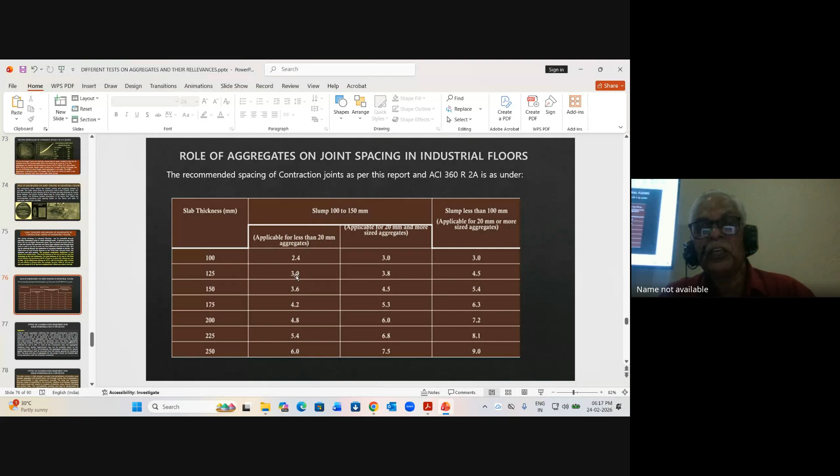Two factors I consider: if aggregate is less than 20 mm, it requires 6 meters spacing of contraction joints. For 100 mm thickness, 2.4 meters; for 125 mm, 3.0 meters, and so on increasing. For higher size aggregate, you can increase the spacing further, meaning joint spacing can be increased by taking advantage of larger aggregate sizes.

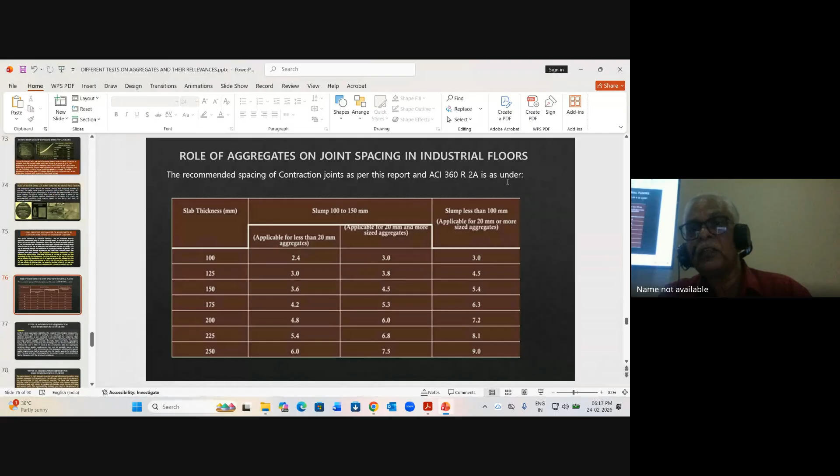So when the slump is less, this is the spacing, as per ACI 360 R 2A consideration.

Then we come to high performance concrete. High performance concrete requires the right mineral composition, shape, texture, and grading. Mechanical properties as per standards are very, very important.

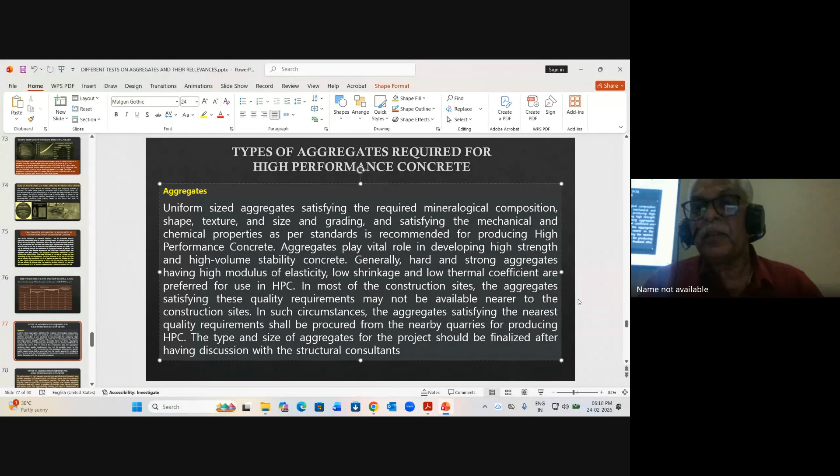More important in high performance concrete is the interfacial phase between aggregate and cement, because the interfacial zone is generally a weak zone. So in high performance concrete, weak zones are not permitted, it has to be made strong.

So what happens in transition? Use of coarser aggregate size is not recommended in high strength concrete. Larger coarse aggregate is not recommended in high strength and high performance concrete, because larger size aggregate basically creates incompatibility in the transition interface zone between aggregate and cement paste, with respect to modulus of elasticity, creep, thermal shrinkage, and Poisson's ratio.

This incompatibility may lead to development of micro cracks in concrete. So the higher the size of aggregate, basically in high strength and ultra high strength concrete, we never use a very large, say 20 mm size aggregate.

So there's just a misconception in the equation that to get high strength, you need higher size aggregate. It's not true. Even ultra high M200 grade concretes are not designed with aggregate more than 6 mm size. So it's very complicated, basically because we have to make a strong interface zone.

I'll show you one typical photograph I've taken.

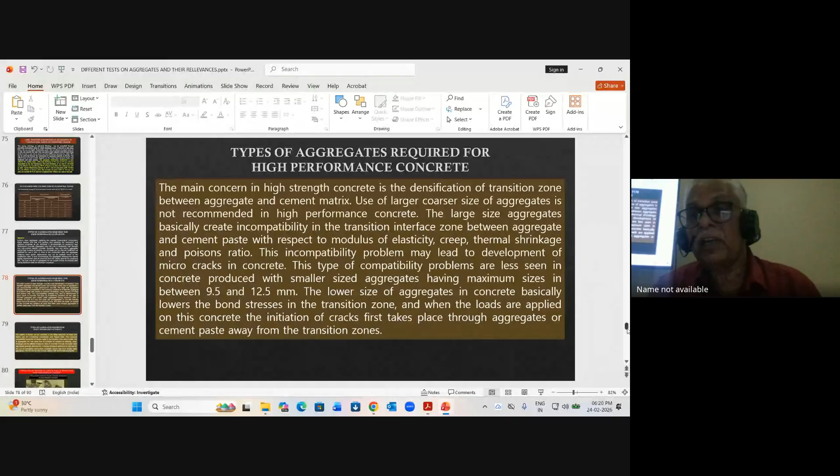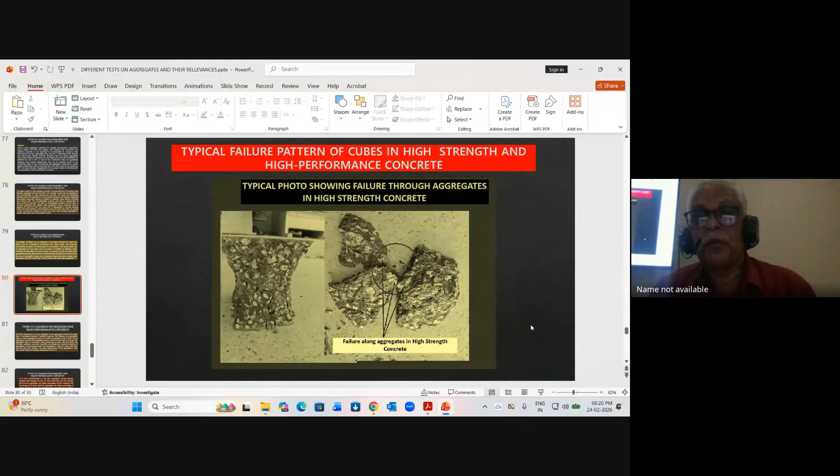See, this is where I have taken high performance concrete. You can see the aggregate here - breaking is taking place in the aggregate. In high performance concrete, the failure should take place through the aggregate, not through cement mortar. But in normal concrete, we allow breaking through cement, not through aggregate. You can see here how it breaks through aggregates in high performance concrete. It's very, very interesting - you can also do some experiments at site and think about it.

Flake and elongation should not be more than 10%. This is another requirement - aggregate should be clean from clay, chloride, sulfates, etc. This is as applicable to normal concrete, and zone 2.

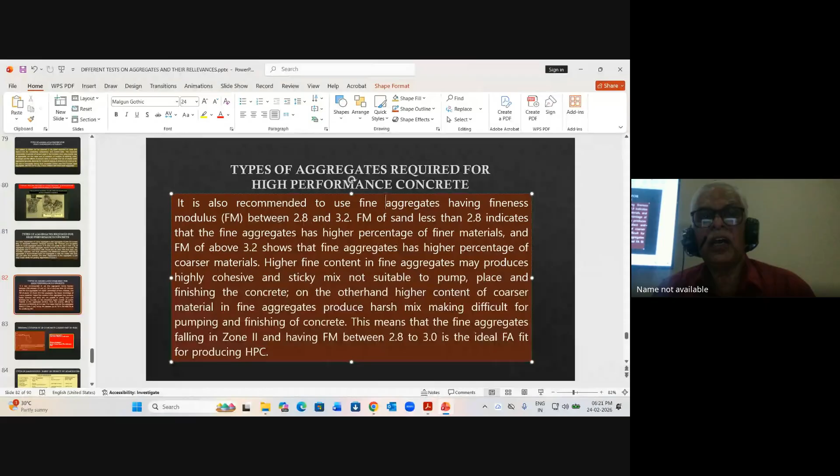And fine sand aggregate - the aggregate of sand should be of... higher percent shows coarse material, lower percent shows fine. So ideal fineness should be 2.8 to 3.0 to fit a high performance concrete. 2.8 to 3.2 is the range, but ideal is 2.8 to 3.0.

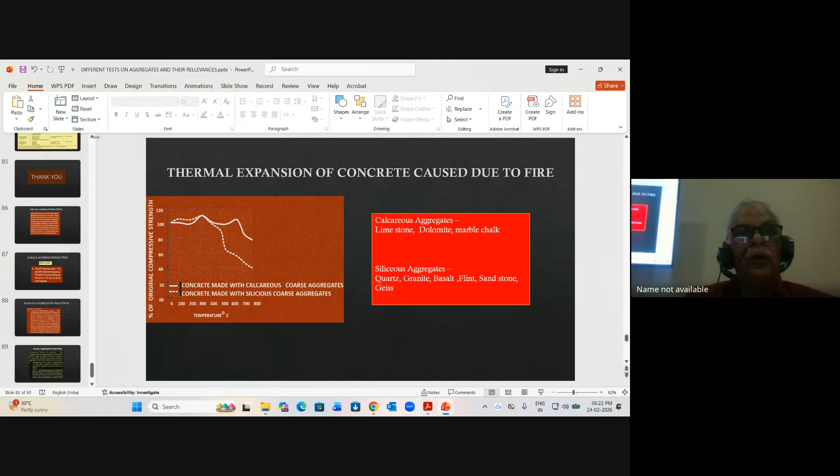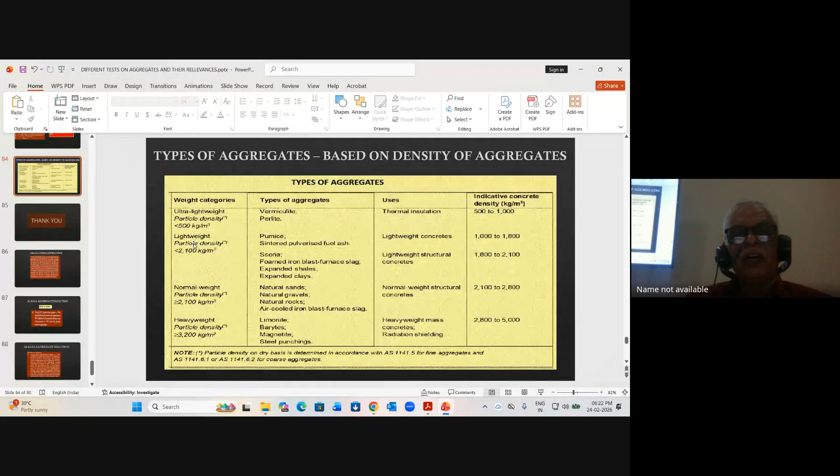So these are the types - when it comes to deviation, density of concrete can be classified as ultra-lightweight concrete, lightweight, normal weight, based on the density you can fix the uses: thermal insulation, lightweight structural concrete, normal weight concrete, heavy weight concrete. These are the types of aggregate for various applications where it can be used. So what is the density of the concrete - these are some of the guidelines given.

I think I have crossed the time limit also. So at this stage, I would like to stop and open it up for further discussion with Kaushik and team. Thank you.

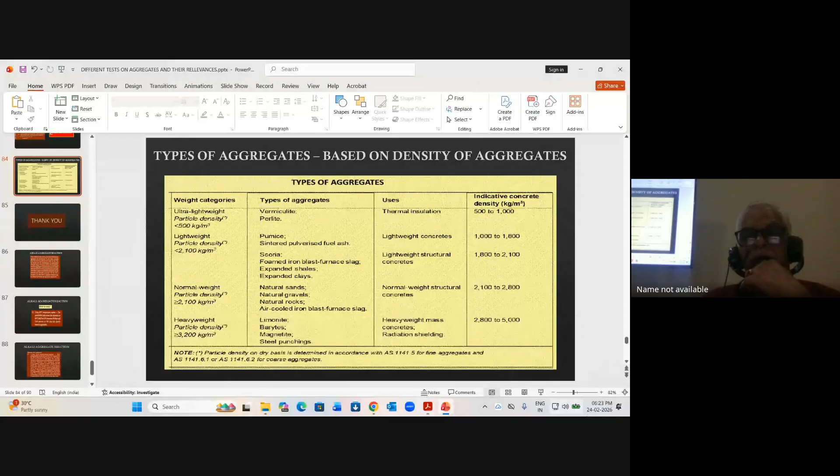Hello, hello. Good evening, sir. Good evening. The audience can post their questions in the chat box, and we will pick the questions and ask the speaker. Right now this can be a question-answer session. Venkatesh sir, you have finished your presentation, sir? Yeah, okay.

Any questions are there? People can post it in the chat box, and we will ask our speaker to give an answer. It seems not many questions are there. Andakumar? Until now we didn't receive any questions, sir. If you are unable to chat in the chat box, you can raise a question in the QA box. Until now, does anyone find any question, Andakumar? Sorry, sir.